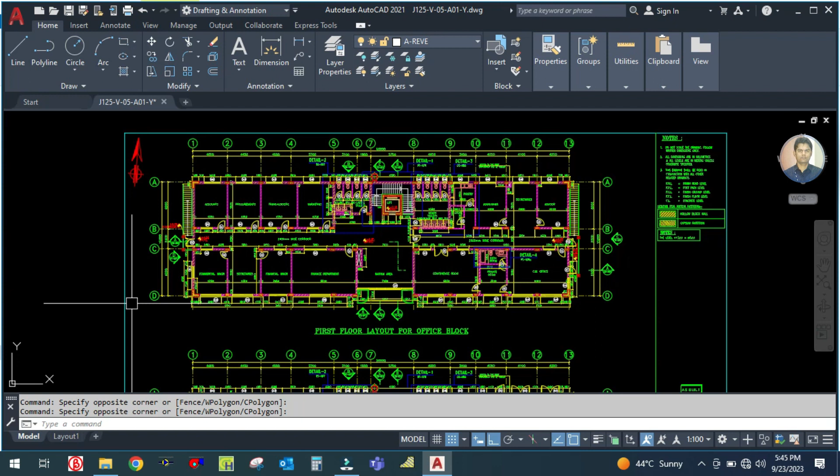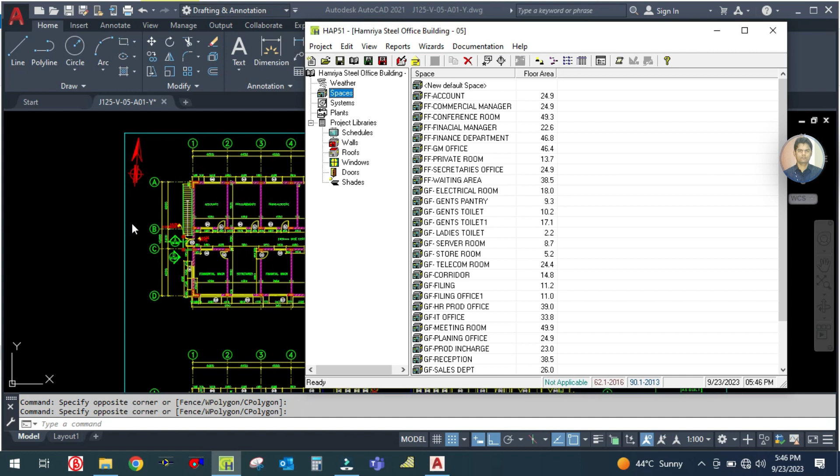Let me open this HAP software. So you can go to the space and you can see I have created so many spaces for the ground floor as well as first floor. In the first floor, we have completed the accounts and procurement office, so let us check here. This is the first floor. The account is already created here.

Now let us start from the procurement office. So let us duplicate this - select account office and duplicate this, and then you have to rename this, which is procurement.

Now calculate the area. You can see here the gross area - you need to calculate it, which is 5.8 by 4.3. So let me calculate this: 5.8 by 4.3, which is 24.94 square meter. Just enter here in the floor area 24.94 square meter. The ceiling height will be same, which is 4 meter, and this is office, so your outdoor air ventilation requirement should be same.

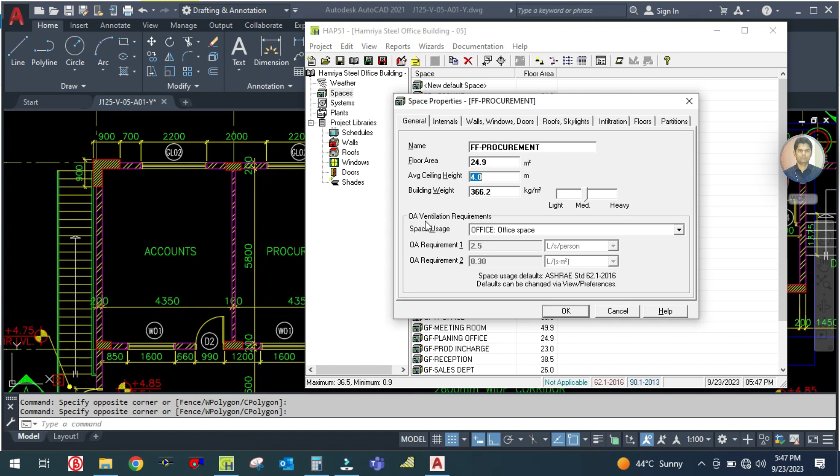Now go to the internal tabs. In the internal tabs, you just enter your number of people, which will be taken from the furniture layouts. So now we need to open the furniture layout - go to your project, and here you can see the furniture layout, so just open this.

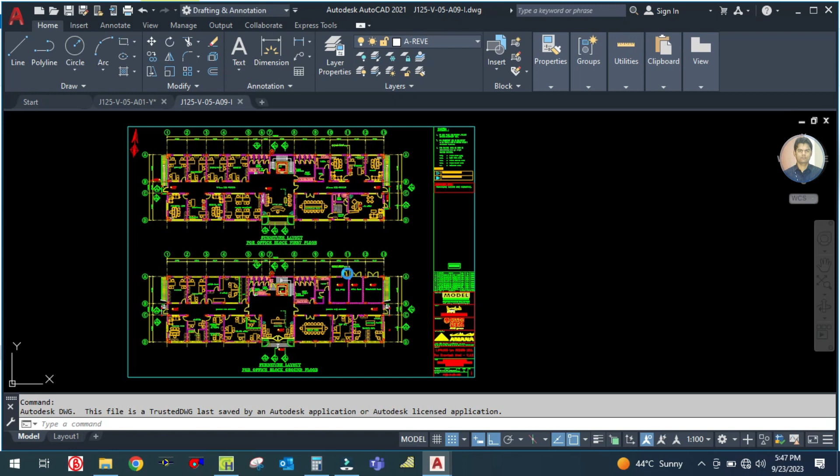So you can see here this is your procurement office, and in this you can just calculate the number of chairs which is here - total 5 chairs are here, so you can enter the number of people is 5. So 2 and 3 is 5, just enter here 5 people.

Then go to the wall and windows tab. In this tab you have to select the exposure, which is only north exposure - this one not used. Go to the north exposure, which has width 4.3 by height 4, so 17.2 square meter, and there is only one window which is GL2.

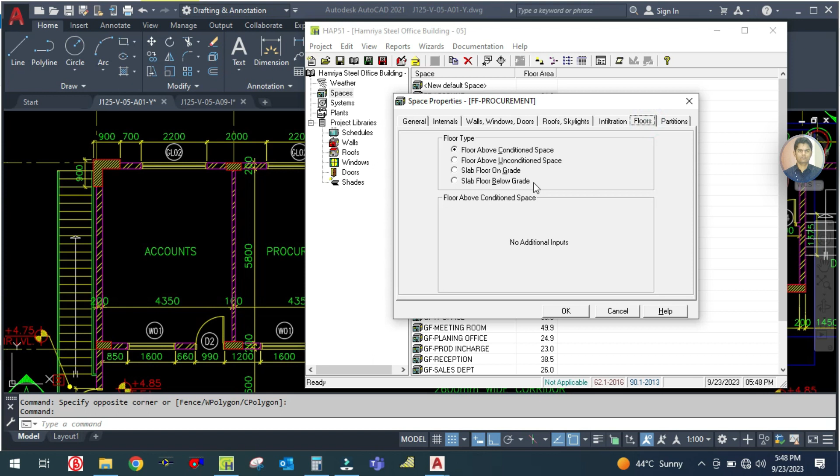Then go to the roof and skylight, and then floor - your floor is above condition space, so select the first option. Then there is the partition tab, so in the partition tab it will be 0, the area will be 0, because the wall and floor there is no partition, so it will be same 0, and click OK.

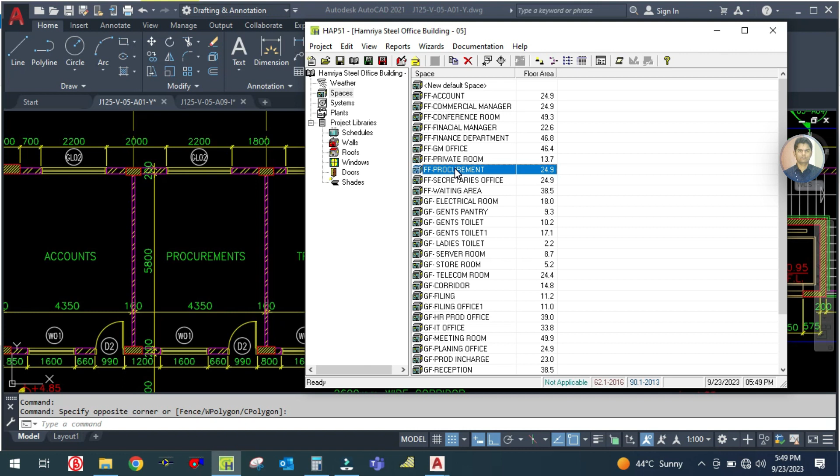So this one is over, and now next is transport and logistic office. Select this, go to the procurement office and just duplicate this - rename it transport and logistic, first floor, transport plus logistic.

Now the area will be the floor area, so just calculate the full floor area, which is 4.7 by 5.8, so 4.7 by 5.8 which will be 27.26 square meter. Enter here in the floor area 27.26. Ceiling height will be same, and this is the office, so again select the office space.

Then go to the internals, and you have to enter the number of people which will be taken from the furniture layout. So go to the furniture layout drawing and count the number of chairs - here there are four people, so just enter here number of people is four.

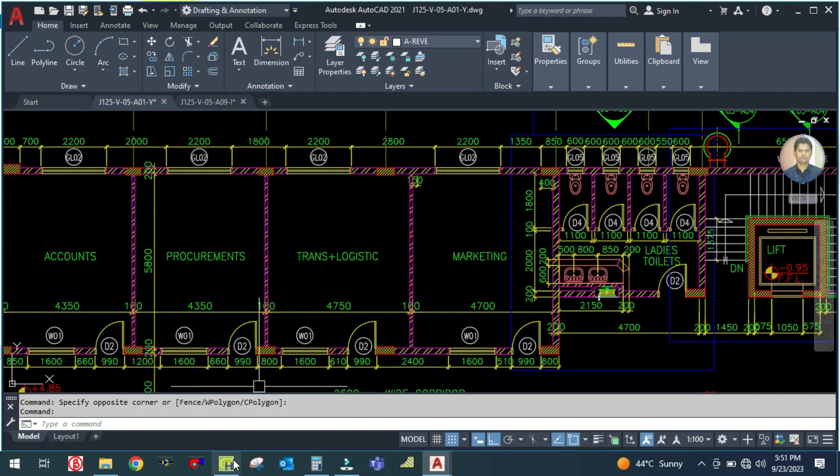Then go to the wall and window, which is north exposure - this wall is exposed outside. The width of the wall is 4.7, and the height is 4 meter, which will be 18.8 square meter, so enter the gross area of the wall as 18.8. There is one window which is GL2, so select the window here GL2 and enter the quantities.

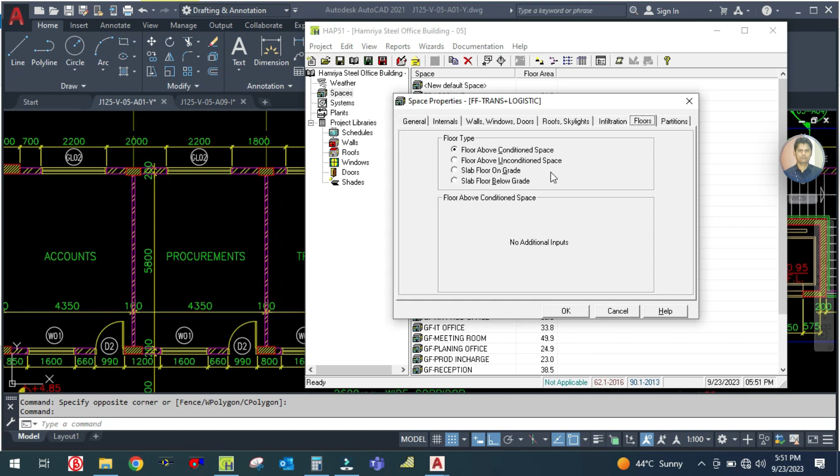Then go to the roof and skylight, so select the horizontal roof which will be 27.3. Then go to the floors and select the first option which is floor above condition space, so there is no input required here, and the partition is nothing, so click OK.

Next is your marketing office. Go here and duplicate this transport and logistic office, and simply rename this and make it marketing.

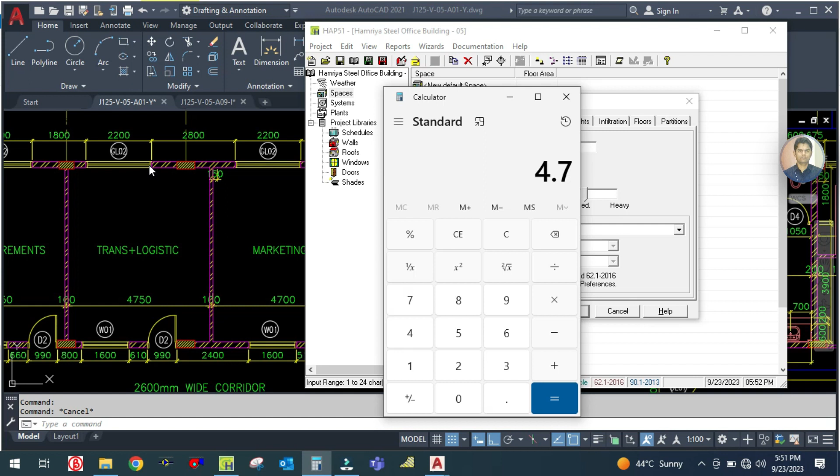So marketing office, width and height will be 4.7 area. So area will be 4.7 by 5.8, which will be 27.26. I think this is almost same, 27.6. And height is same, ceiling height and office space.

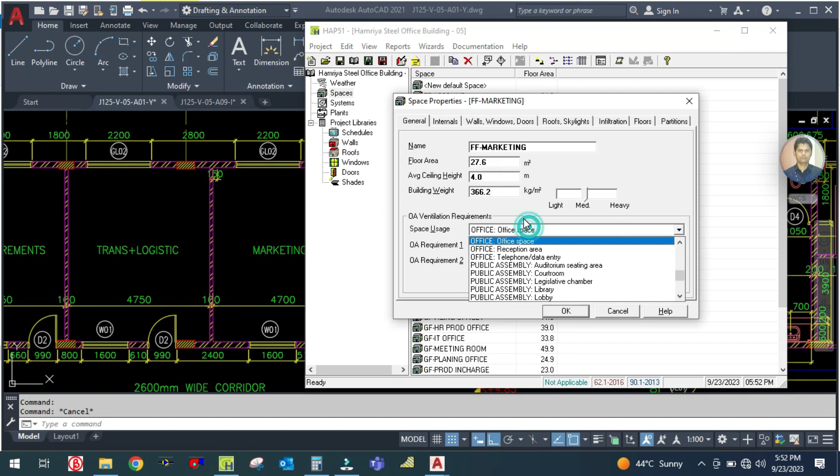Select the office space here, then go to internals and enter the number of people from furniture layout. Go to the furniture layout plan, and here you can see the marketing office has six chairs available, so enter the number of people as six.

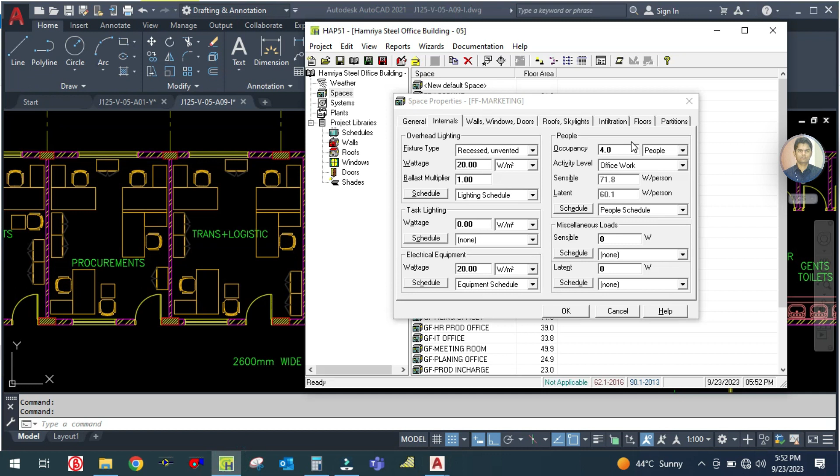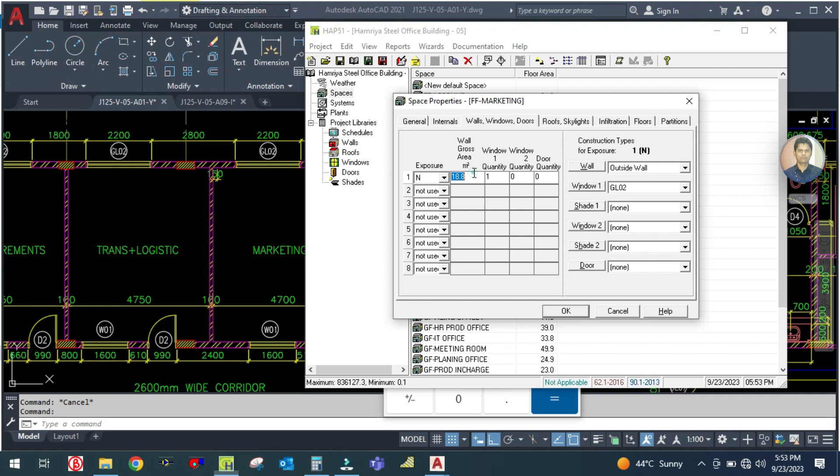Then go to walls and windows, and you can see there is north exposed wall, 4.7 by 4, just calculate the gross area, which will be 18.8. So here is same, and there is one window which is GL02, you can see here GL02. So there is no changes here.

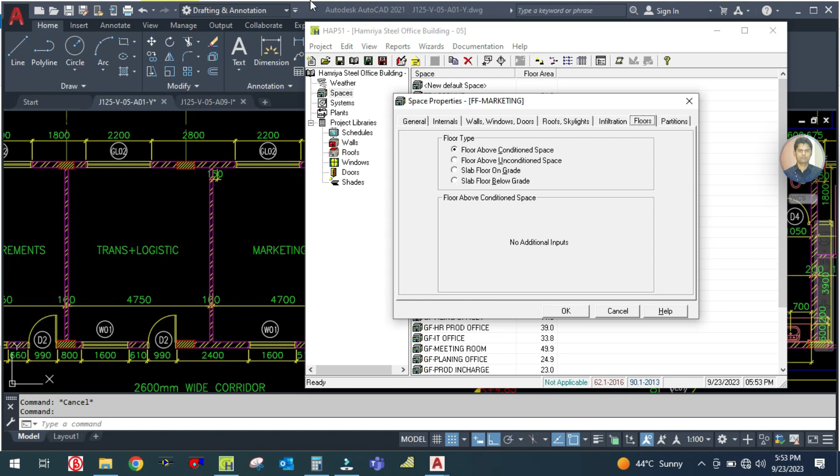Then go to the roof and skylight. Roof and skylight, there is horizontal roof. The roof gross area is 27.6. Then go to the floor. Your floor is above condition space, and there is no partition here. Just click OK and save this.

Now you have to go to this ladies toilet, which is here. We have to calculate this area only, because the air conditioning will be only for this area. In this area there will be ventilation.

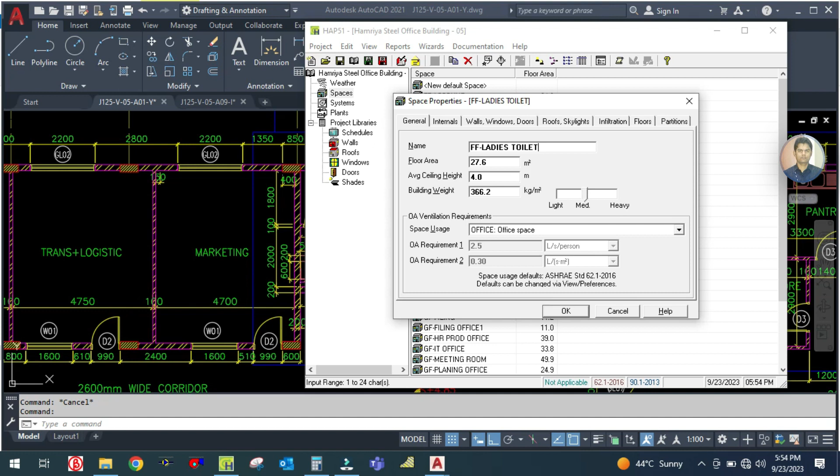So go to the ladies toilet, duplicate marketing office, and rename this as ladies toilet. The area you can check with the DLI command, dimension linear. Select from here to here, which is 4.7, and from here to here, which is 2 meters. So 4.7 by 2, area will be 9.4 square meters.

So here is 9.4, and height is 4 meters. Here you can select, do not select anything, user defined, leave it, because this is the toilet and we are providing treated fresh air as outside air for ventilation purpose, so there is no outdoor air requirement here.

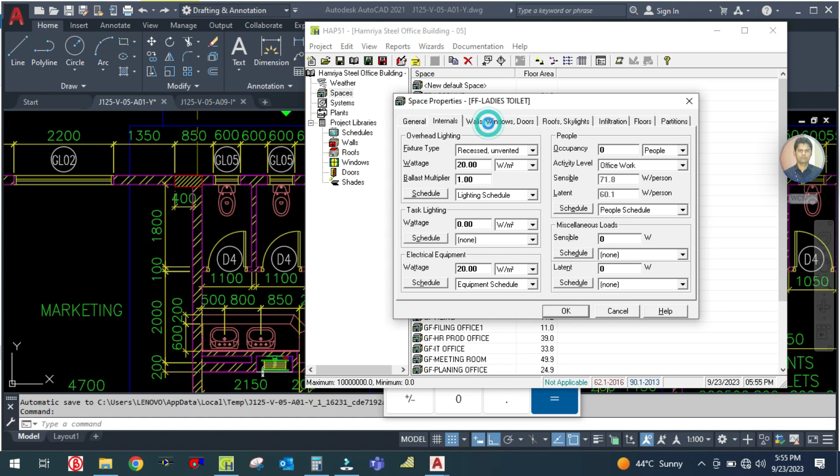This air will act as outdoor air, and in internals, number of people will be zero, because all the time there will be no people, and lighting load, electrical load will be same. And exposure, you can see there is no exposure. We will treat this wall as a partition, so select this will be not used, and here is also none.

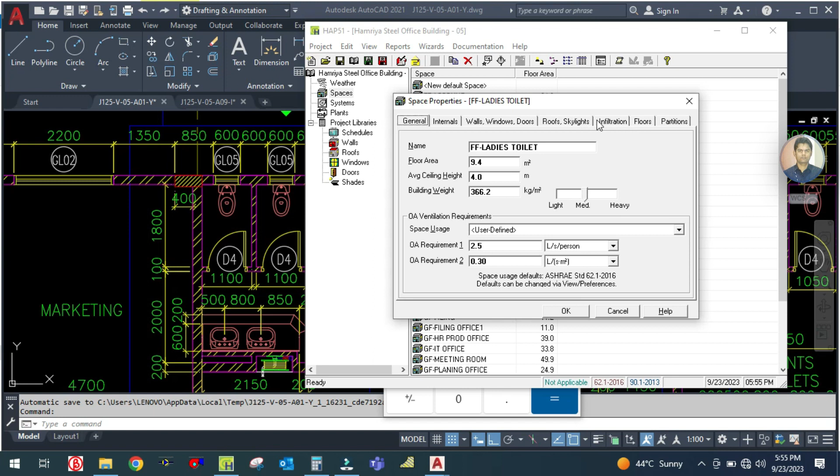Then go to roof and skylight, so horizontal roof, and the area is 9.4, and then go to the floor.

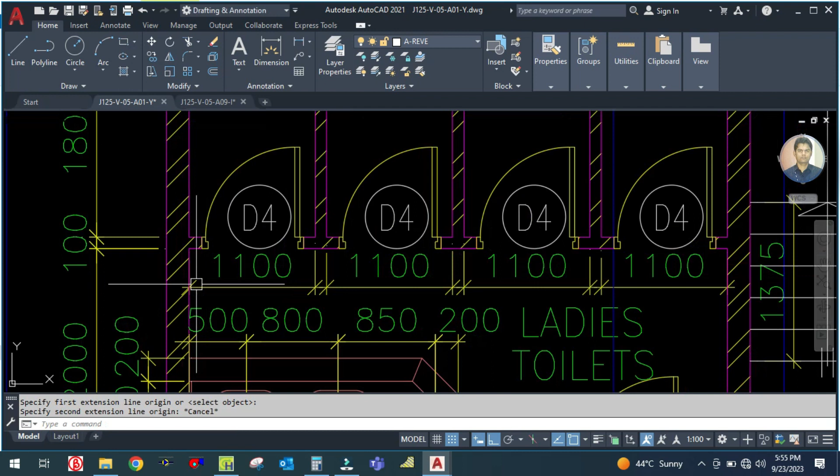Your floor is above condition space and partition, there will be wall partition. So this wall, select this wall from here to here. 4.7 by 4, this will be your partition, 18.8. Your partition will be here 18.8.

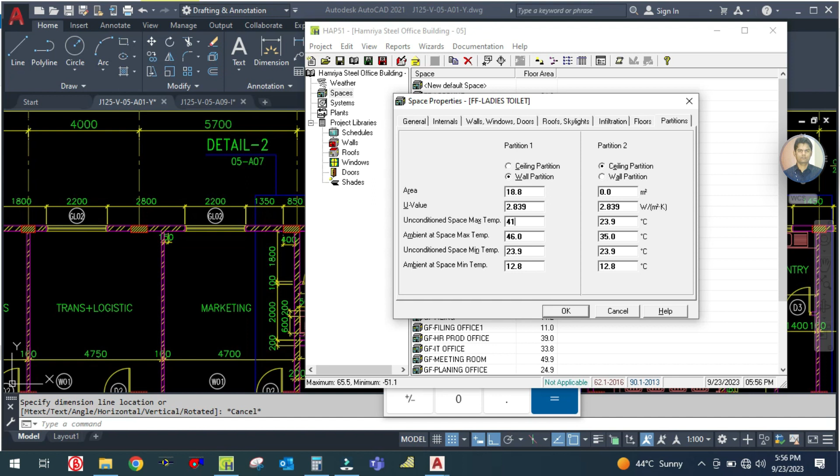Then ambient temperature you can change, which will be 46. And this unconditioned space maximum temperature will be less than 5 degrees from the ambient, which will be 41. Click OK. Here, select none for the ladies toilet. Now click OK, save this.

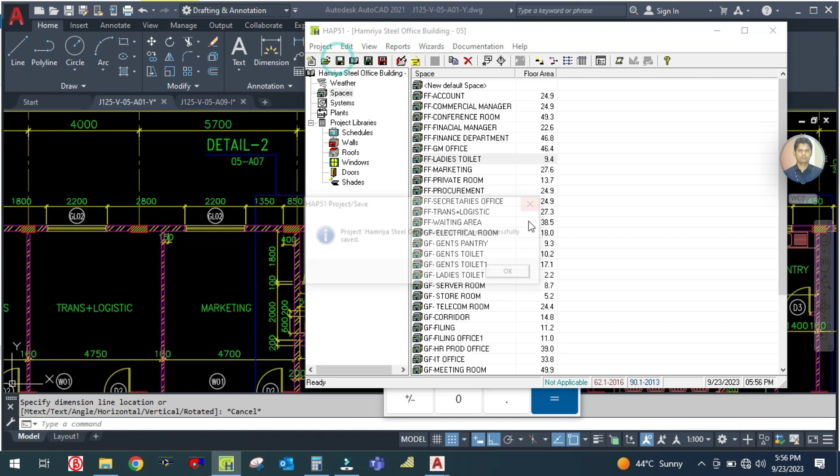Now there is one toilet balance, which is gents toilet. In the gents toilet we also select the same, 4.5 by this area, let me check this from this wall until this wall. Okay, 3.9. So this is the gents toilet.

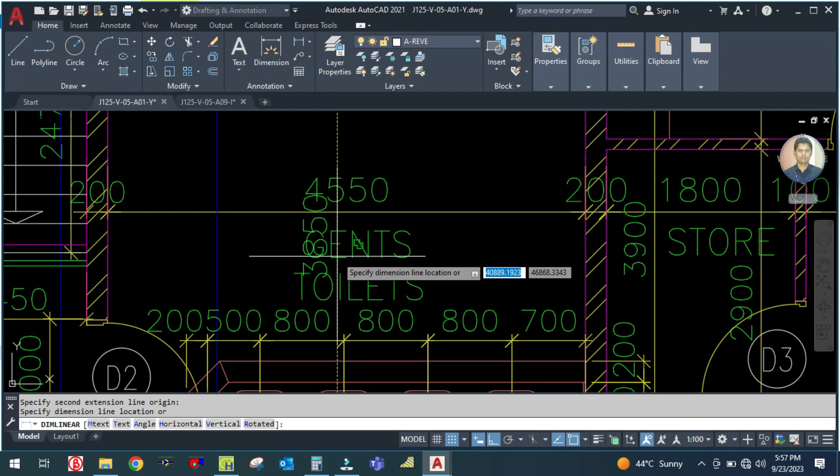Just select ladies toilet and duplicate this, and make it here gents toilet. Gents toilet, and the area is 4.5 by, from here to here, which is 3.9, 3.8. So 4.5 by 3.8, which will be 17.1.

So here is 17.1, and this is user defined, number of people will be 0. Wall and exposure, there is no exposed wall, and roof and skylight is 17.1.

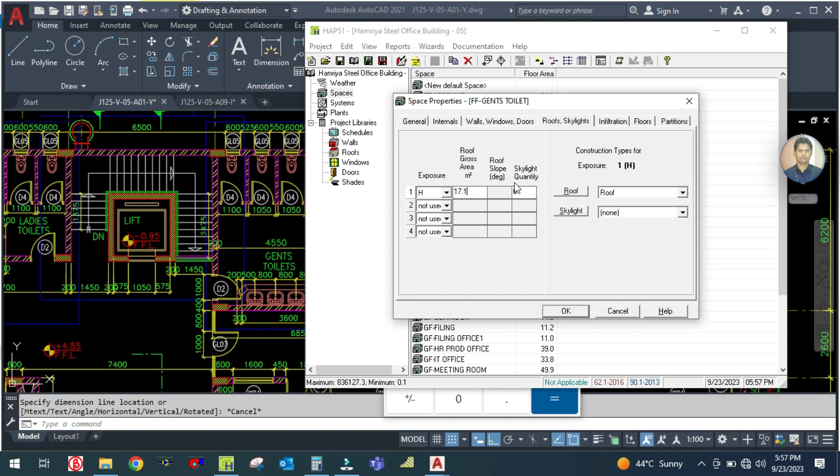So here is 17.1, and floor is above condition space, and there is partition which is 4.5 by 4 meter, which is 18 square meter. So here is 18. Now click OK, just save this.

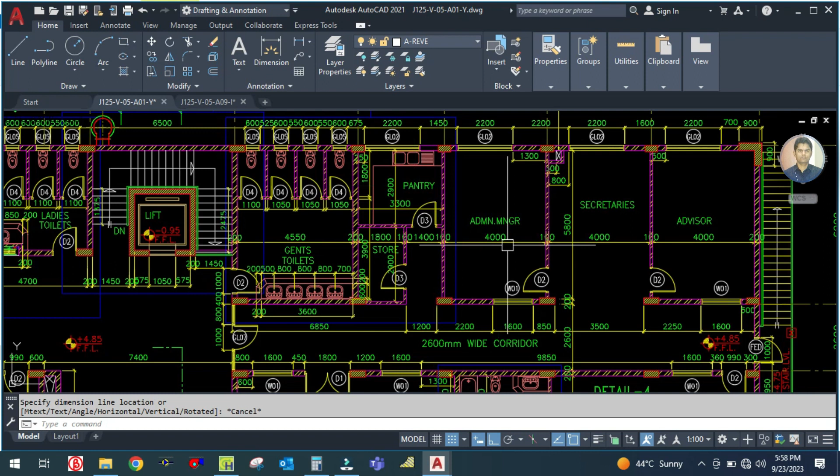So we have calculated up to here. In the next tutorials we have to continue from the store, pantry, admin, secretary advisor and all. I hope you guys learn how to create this space in the app. In the next tutorials I hope we will continue and finish creating the space.